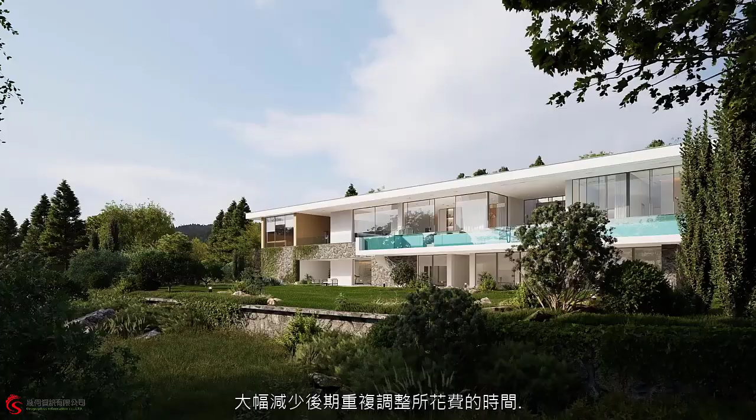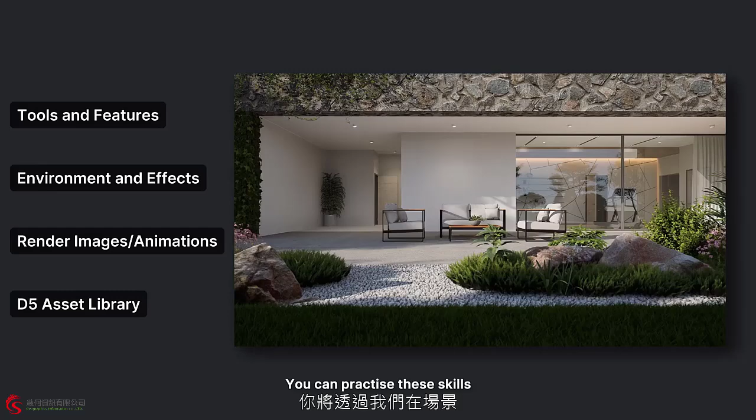In this video, we'll guide you through the basics of D5 Render with the Avila project. You will learn the fundamental tools and features of D5 Render, how to set the environment, lighting, and effects, how to export rendering images or animations, and what's in the D5 Asset Library. You can practice these skills on the empty spaces we prepared in the scene. Okay, let's start the journey.

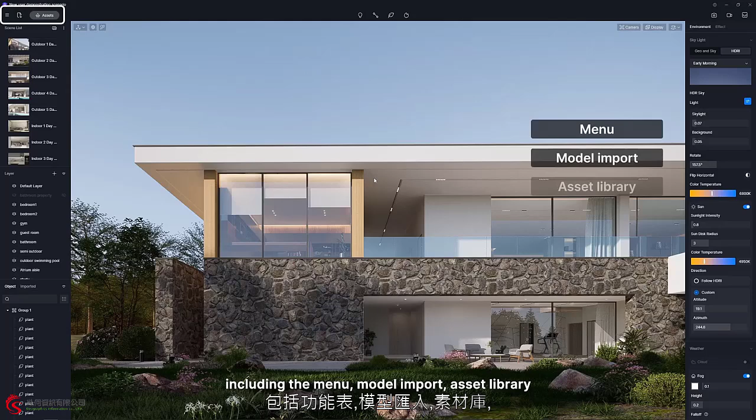To newcomers, a user-friendly UI is of great importance. The navigation bar is a one-stop shop for all your commonly used features in D5, including the menu, model import, asset library, and rendering output.

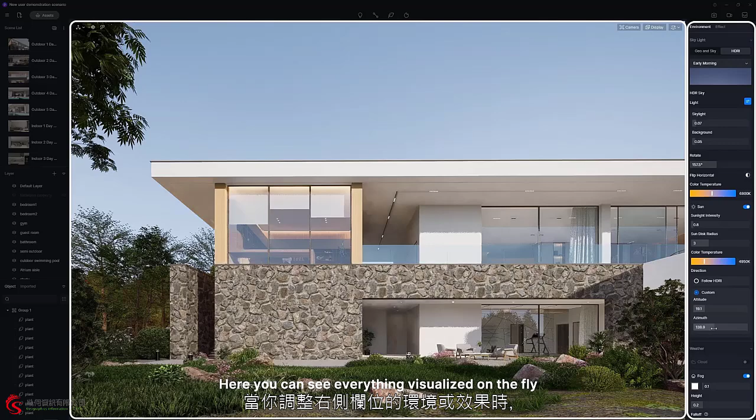You'll find the scene list, layers, and resource list on the left side, where you can manage perspectives and resources like models, lights, or particles with ease. In the middle is the real-time viewport. Here you can see everything visualized on the fly when you edit the environment or effects on the right sidebar.

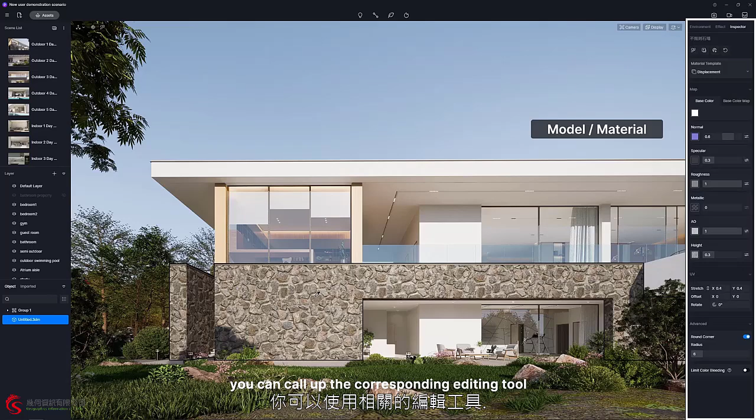Up in the top right corner, you'll find settings related to the camera, display, and navigation modes. On the top left, there are model and material selection tools. After selecting a model or material, you can call up the corresponding editing tool. You'll also find light and model placement tools spread throughout the middle, making it easy to quickly set up lighting and build your scene. Stay tuned for our upcoming tutorials where we'll dive deeper into how to use these tools.

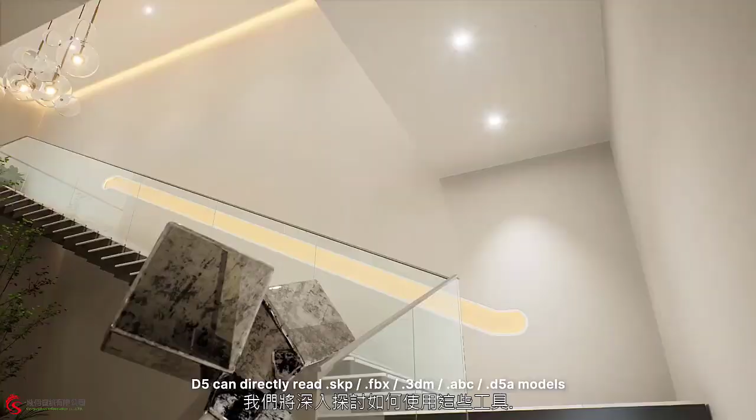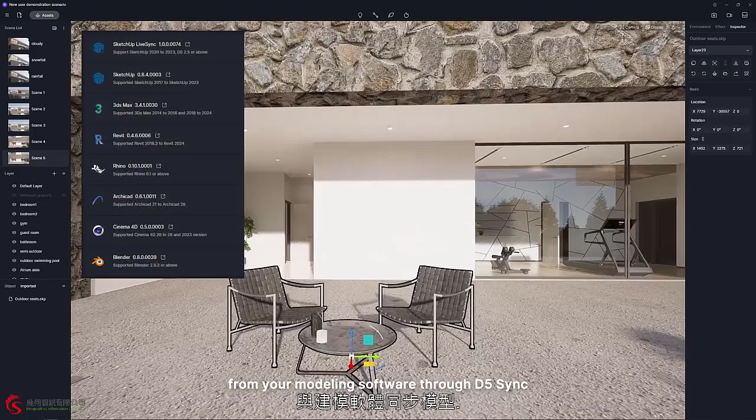D5 can directly read SKP, FBX, 3DM, ABC, and D5A models. You can click on the import button and open the needed ones. The imported models will automatically appear in the resource list. D5 also supports syncing models from your modeling software through D5 Sync.

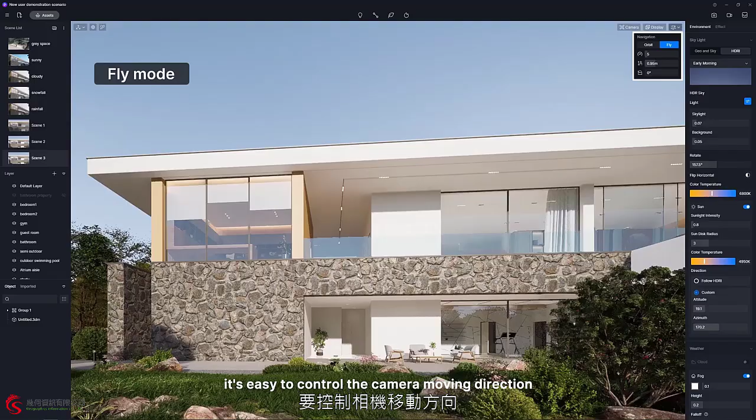You can navigate through the scene in orbit or fly mode. Orbit means the viewport orbits around the central point when pressing the mouse wheel. You can offset the camera with the Shift key and the right mouse button. In fly mode, it's easy to control the camera moving direction with the WASD and QE keys.

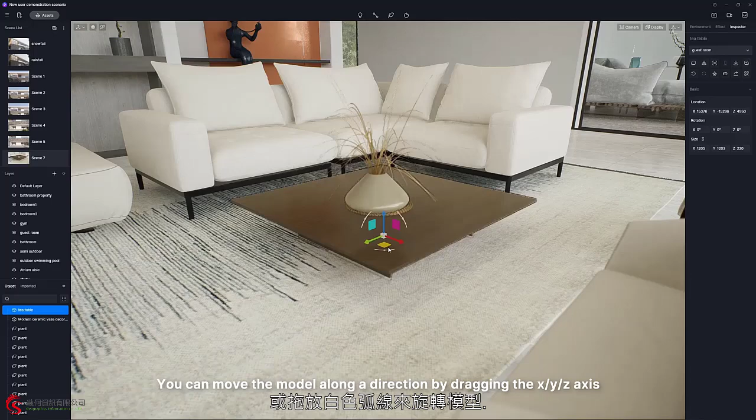The Gizmo tool allows you to move or resize an object. After selecting a model, the Move Gizmo will appear at the center of its base. You can move the model along a direction by dragging the XYZ axis, or rotate it by dragging the curves in the middle. Pressing the shortcut key V will switch the gizmo from move to scale. When disconnecting the aspect ratio, you can resize the object across a single axis only.

You can play around with different perspectives in the scene list. Once you're done setting up, remember to hit the update button and save the changes. Then you can flip between different scenes, each with its own environment and perspective, just with a simple click.

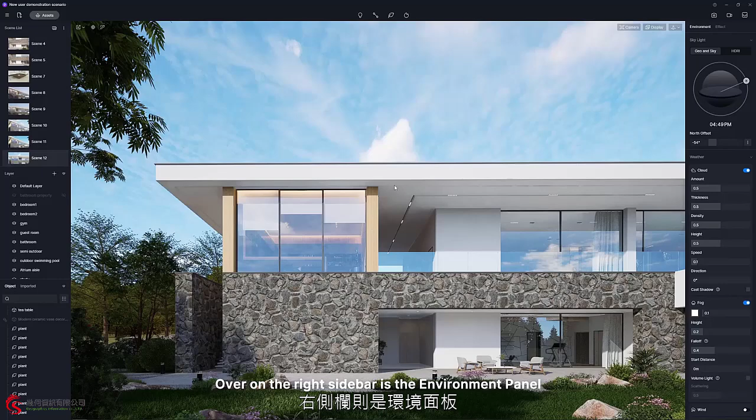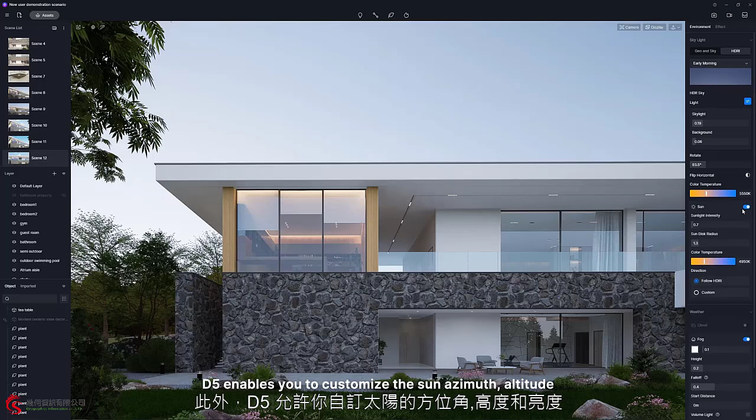Over on the right sidebar is the environment panel, which includes Geo and Sky and HDRI. This is your control station for the sky and natural lighting. Besides the built-in HDRI, you can import your own and tweak the brightness, angle, and color temperature to your liking. D5 also enables you to customize the sun azimuth, altitude, and brightness, helping achieve perfect natural lighting. You can also input the real-world location, date, and time in Geo and Sky to reproduce sunlight from anywhere in the world. You can even control how soft the shadows are with the sun disk radius.

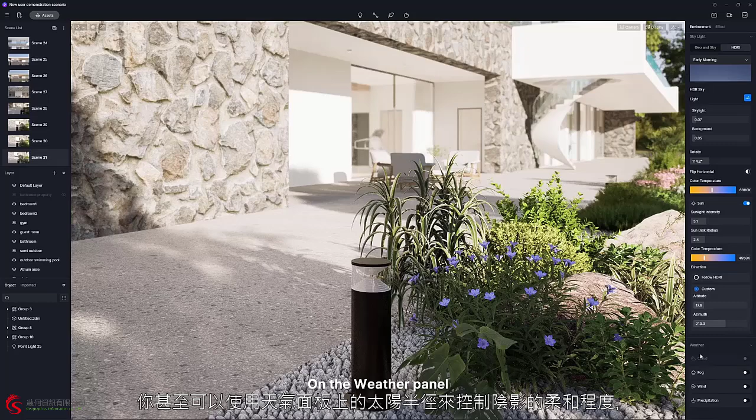On the weather panel, you can adjust wind, clouds, fog, rain, and snow, and watch the changes in real time in your viewport. To really bring your scene to life, try using fog together with the sun to create a Tyndall effect.

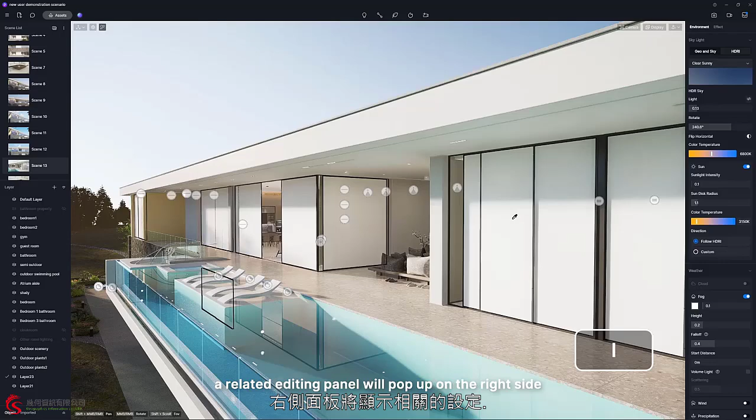Once you've picked a material with the material selection tool, a related editing panel will pop up on the right side. D5 offers 10 widely used material templates, while you can also customize your own. Glass, for example, needs the transparent template. Tweak the texture maps, color, and UV to reproduce the real-world effect.

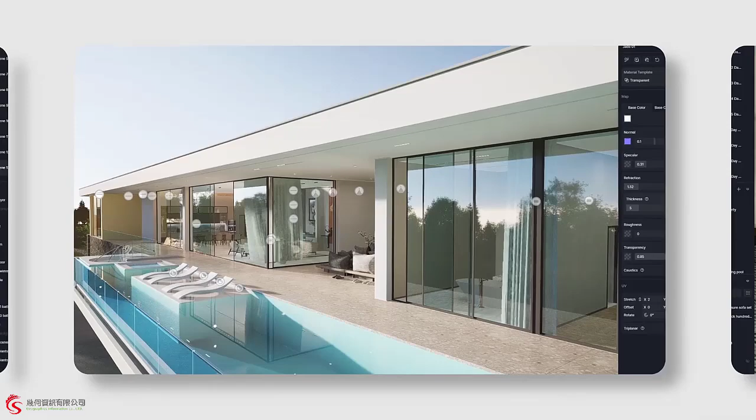You can easily set up a variety of light sources in D5, including point lights, spotlights, strip lights, and rectangular lights with shortcut keys 1, 2, 3, and 4. Intensity controls how bright the light source is, with a maximum value of 8 million.

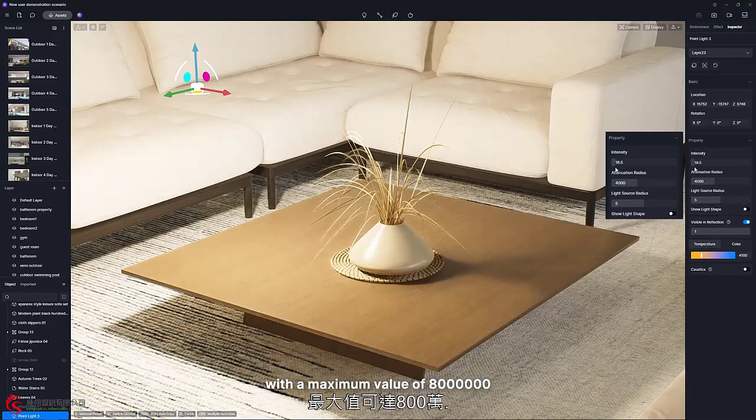Attenuation radius controls how far the light source could illuminate. Light source radius can make the shadow edge softer or sharper according to your need.

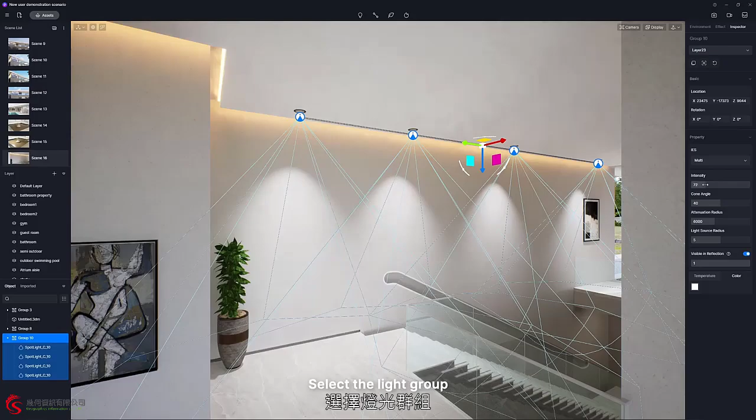Here's a cool trick: you can link the same type of light sources together by grouping them with the shortcut keys Control and G. Select the light group and you can adjust them all in one go.

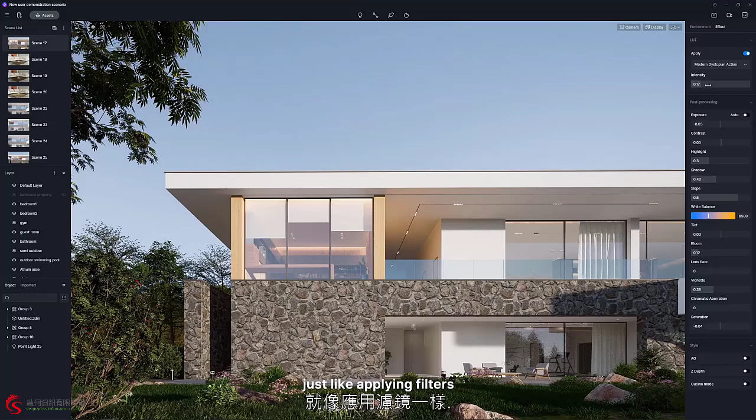The post-production effect panel on the right sidebar is your magic wand for tweaking color tones or special effects of your visuals. Think of LUT as your quick stylist - it allows you to swiftly switch between different visual styles, just like applying filters. Post-processing parameters control white balance, contrast, and more of your images, while style parameters can help add an artistic touch.

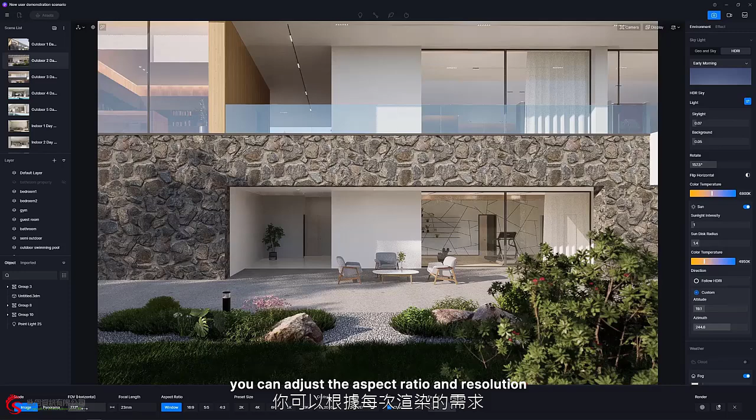Navigate to the top right corner and click on the Image button. Here, you can adjust the aspect ratio and resolution as per your requirements and determine whether to generate Material ID, AO, among other channel maps. You also have the choice to generate a panorama.

Once you've made your selections, click on the Render button to start rendering.

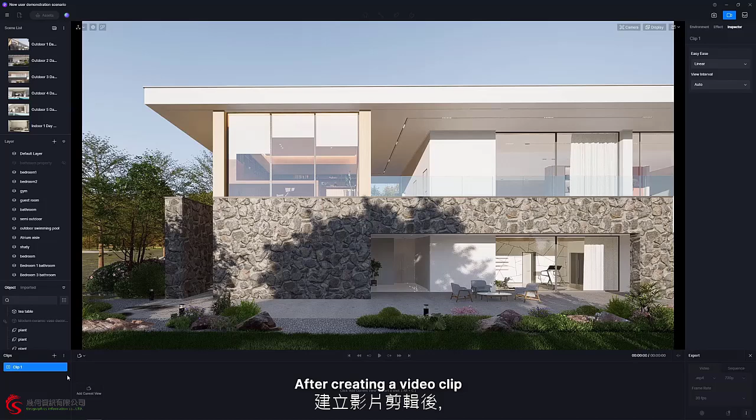Besides images, animation can be easily made in D5. After creating a video clip, you can add frames to the timeline and set the time interval between frames and the camera easing. That's it.

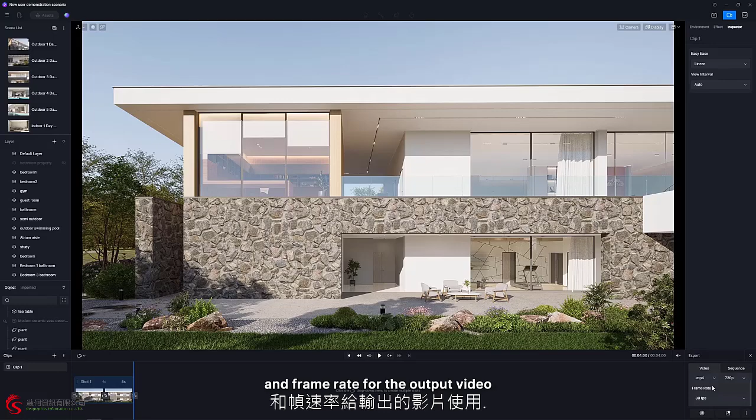Click play to check the clip. You can see a smooth transition between frames. Over on the right sidebar, you can define the format, resolution, and frame rate for the output video. When you're all set, just hit render and watch your video clip come to life.

D5 also supports batch rendering for both image and animation. Add the needed ones to the render queue, then you can render them all together.

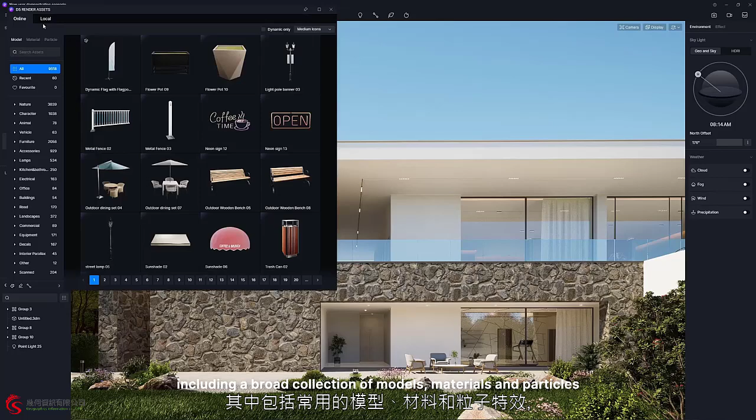D5 Render has a built-in asset library, including a broad collection of models, materials, and particles. You can open the asset library from the navigation bar or simply press the shortcut key M.

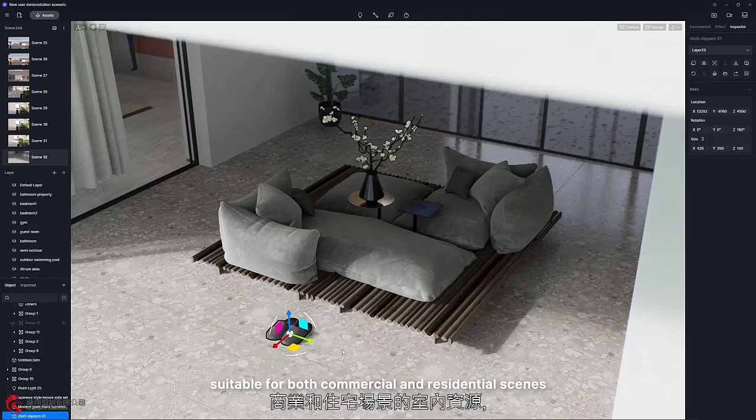There are in total over 10,000 assets in the library, including over 4,000 interior assets suitable for both commercial and residential scenes, more than 2,000 out-of-the-box materials for architecture, interiors and landscapes such as concrete, wood, and glass, and more than 3,000 plants from around the world that can be used in local projects everywhere.

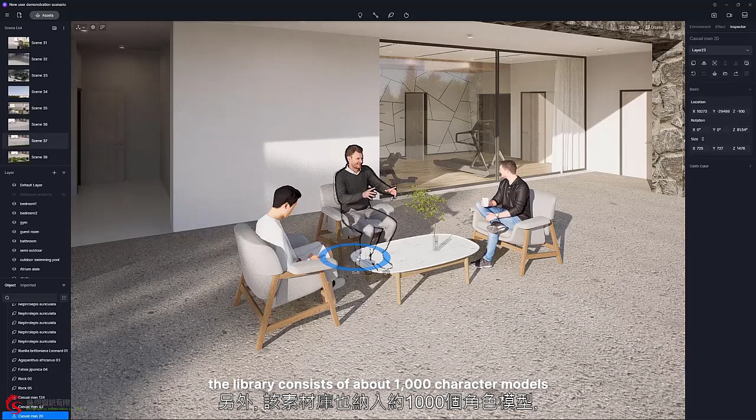Furthermore, the library consists of about 1,000 character models applicable to a wide range of business and leisure scenarios. This includes many slightly moving characters.

In addition, D5 Asset Library offers nearly 100 adjustable particles that can be used to create atmospheric effects, such as fountains, bird flocks, and smoke.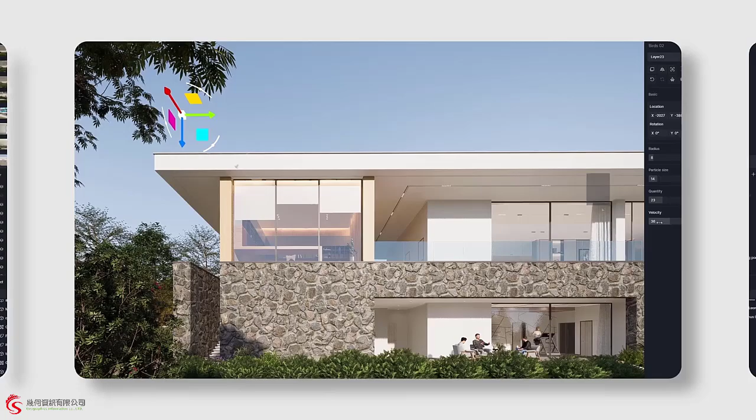You can quickly find any assets you need by searching for their keywords or bookmarking your favorite ones into a collection. Some handy tools in D5 let you arrange assets like a pro in no time.

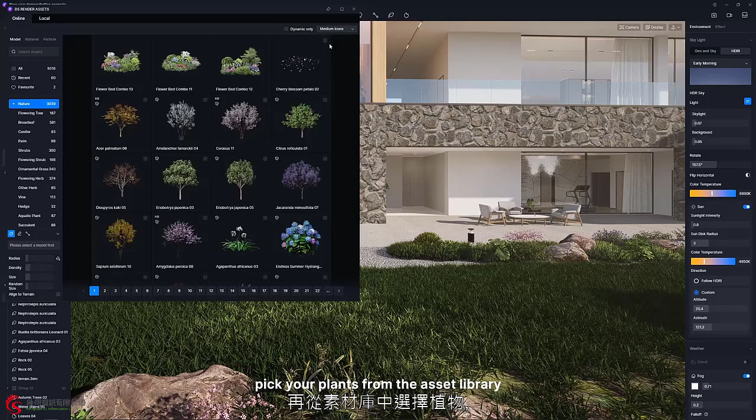Brush Scatter tool for plants: grab the brush tool from the toolbar, pick your plants from the asset library, and paint them onto your scene, easy as pie.

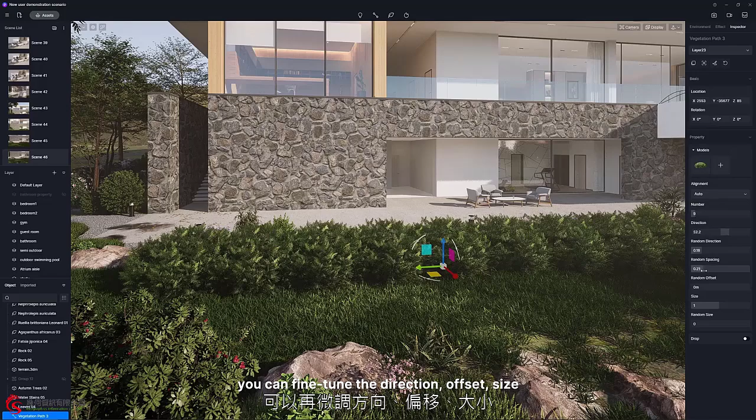Path tool for plants, vehicles, or characters. After selecting the path tool, choose the plants, characters, or vehicles you need and draw the path right in your scene. Once you're done, you can fine-tune the direction, offset, size, and other parameters of the objects on the path.

Group tool for all the models. You can bundle any models into groups and save them to the local library, making them easier to grab and use in later projects.

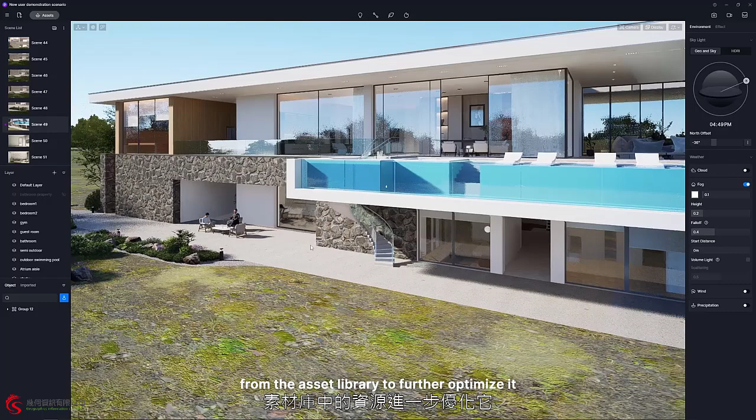We leave some empty space in the demo scene so you can utilize resources from the asset library to further optimize it. Through this process, you'll gradually master the techniques of using D5, experiencing the allure of real-time rendering.